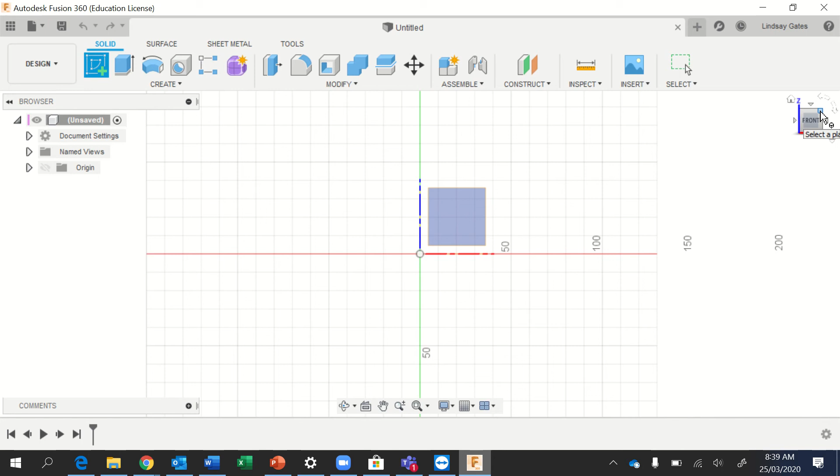If you click on front, you'll be able to look at the front view. Click on the top right corner, you can see from the top right corner. If you click from the top, you can see from the top. And if you click home, you can go back home to a standard point of view.

You always want to start with a sketch. So if I want to draw a sketch, I'm going to choose a plane. I'm going to select my top plane, which is this area here. Try not to be confused with the front or the left or right plane. Click the top, and it'll bring this face towards you.

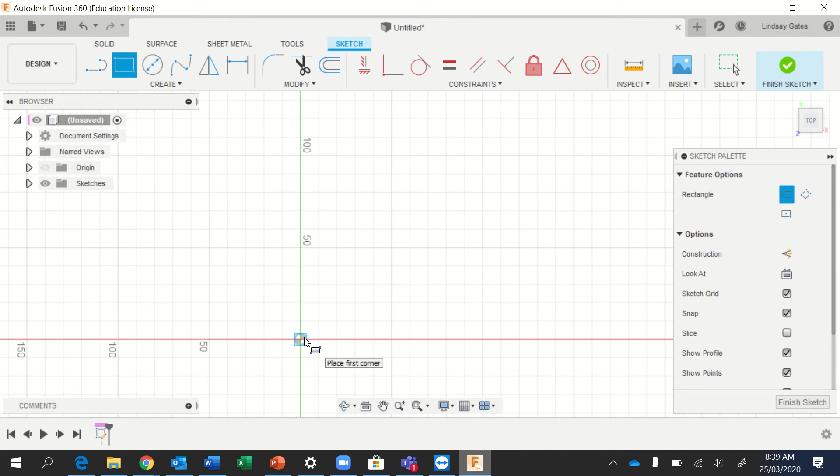I'm going to draw my rectangle. Another command for a rectangle, if you hover over it, it will tell you R. So if I hit that button, or hit R on my keyboard, I can start in the front corner. I know my piece is 140, so I'm typing 140, hitting Tab to switch to the other dimension, then typing 200, and hitting Enter, and I have my piece.

If I zoom out, hold my scroll button down, I can move my piece around. So what I'm going to do is finish my sketch, then view it from home. There's my drawing. Next thing I'm going to do is extrude my piece.

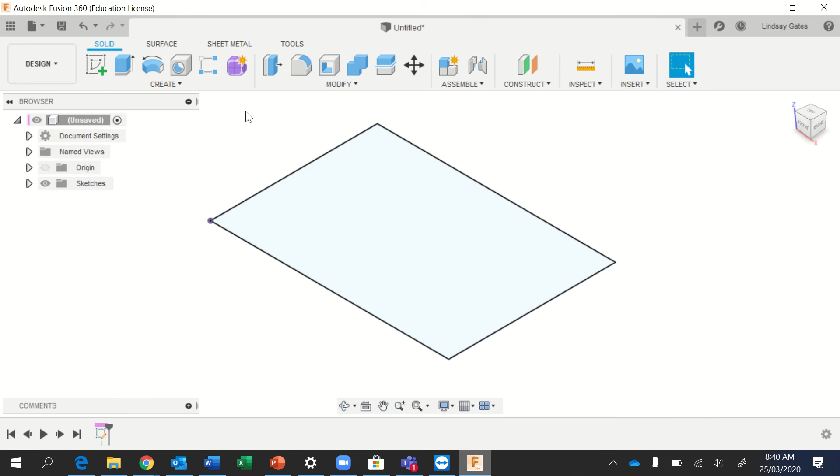Once I click extrude and click the profile, this is a list of what you need to do. Profile - it's already selected. I'll show you how that works. If I deselect it, then click the profile, it's starting from there. We want a new body, that's fine.

We're going to type in this box here, 40 millimeters. And there we have our box, okay?

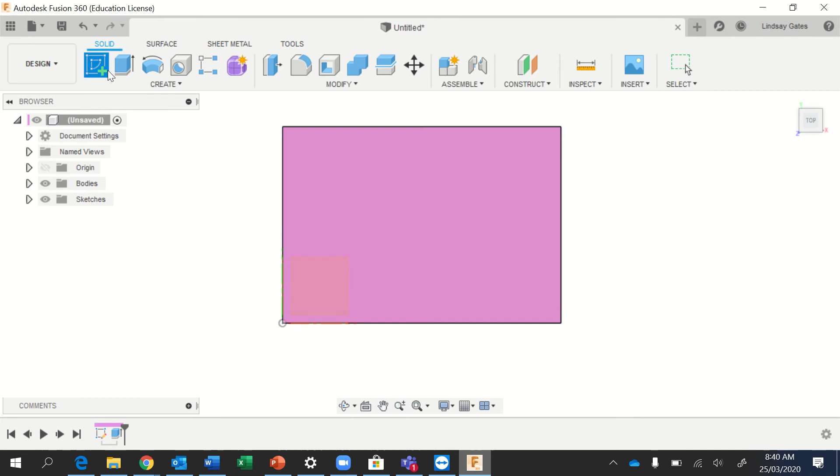Next thing we want to do is create a sketch on top of our drawing. We know that we have a circle almost directly in the middle. If we click the circle tool, which is just up here, or hit C, and move our mouse around the center, we'll end up with these little triangles, same as for the side. So if we roughly align the center with the center, we get our center point.

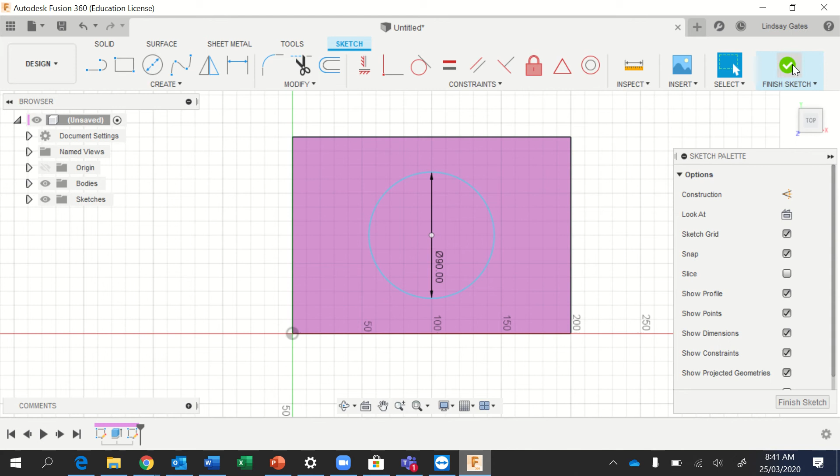We know that our circle is, I believe, 75 millimeters. If it's not, and if it's different for yours, you can change it by simply going in and adjusting it - just double click on the dimension and you can change that. Actually, from memory, I think it's 90, sorry, my apologies. Okay, once I've drawn my circle, next thing I'm going to do is view it from home.

And I actually want to remove this circle. So I'm going to hit extrude, click the circle that I want. Now I actually want to cut this out, so I'm going to drag it down, all the way down, and hit enter. And I have my circle through the center of my money box.

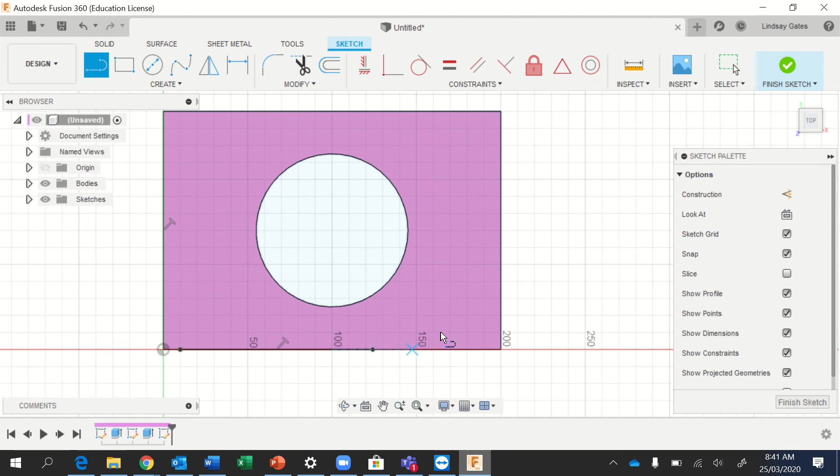Next thing I'm going to do is create another sketch on top of my drawing, and draw a bit of a shape, okay? You can use a line tool, which does something like a straight line along here. So you could do a straight line and another line and another line, click, click, click, up to you what you'd like to do. Maybe make it go out a bit. Now remember, this is just all random shapes, and link it back together.

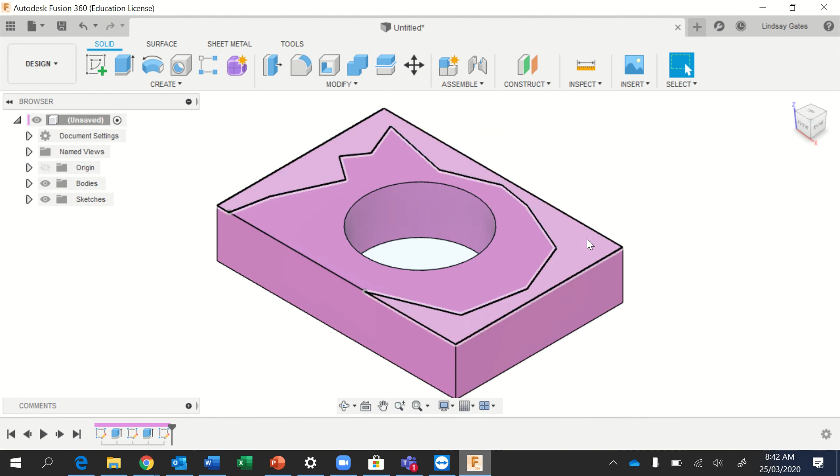So if that's my shape, as unusual as it is, and I'm done, I'm going to click Finish Sketch. Next thing I want to do is remove the area around the outside. So if I view that from home, click on this area I want to remove, click Extrude, and just drag this blue slider straight down, it will remove the area, and I should have my money box of that shape.

Now, I'm just going to undo those steps because I don't actually want those lines. I'm going to do something a bit different - I'm going to draw with a spline tool.

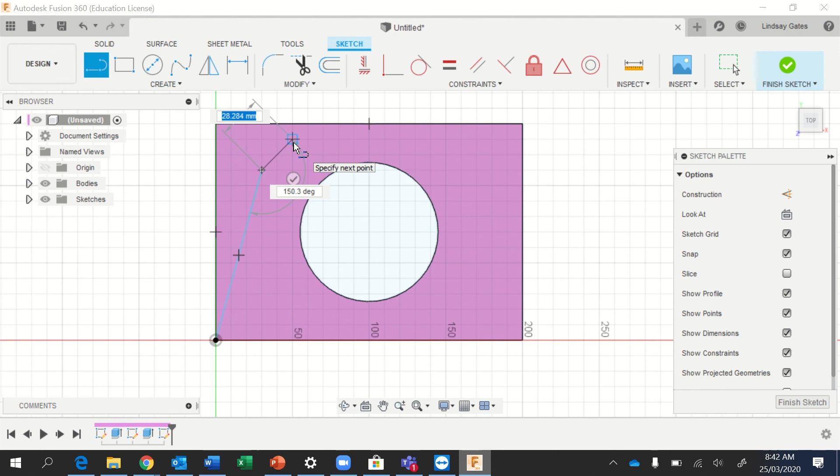So if I have, for example, a normal line and I have a shape that goes like this, but then I want to say automatically when I finish a line it has another one there - all you need to do is hit enter to confirm it, or when you're finished, press escape. If I click my spline tool and click on my starting point, and specify a second point, I can then use my mouse without clicking to curve this line, okay?

Now you can adjust these later, so if it wanted to be a bit of a curved shape, whatever this may be for you, you can adjust this as can be. So let's just say we're going to go like so. That's going to be our line.

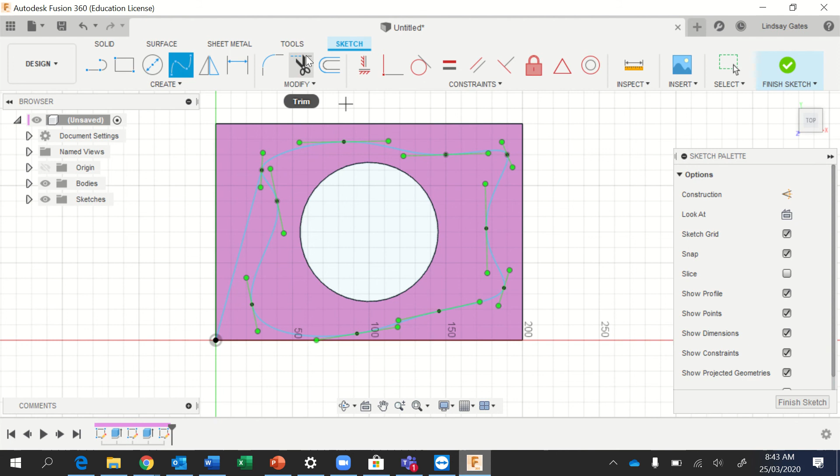Now if there's a line I don't want, I'm going to go up here to my trim tool, click trim, and delete the line I don't want. Finish my sketch, go view from home, go to my extrude, click the area I don't want, and drag it down to remove it. And there I have my money box shape.

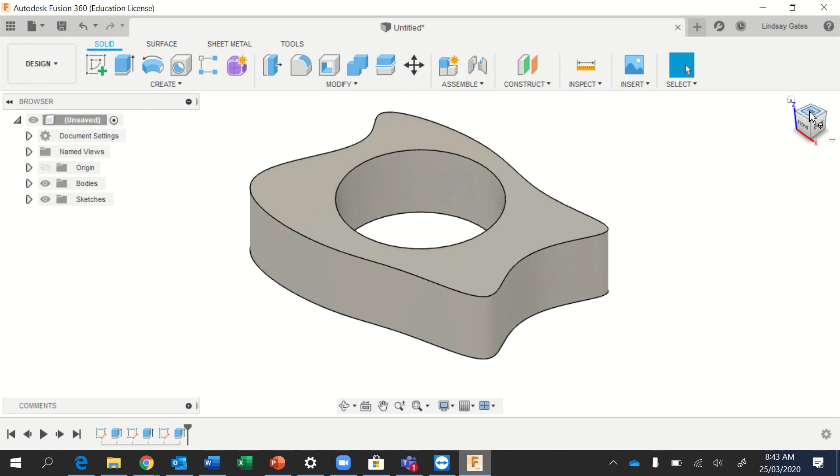Now you can toggle the cycle component color to make it grey if you'd like, up to you. You can actually adjust the appearance later, but for now, I'm going to let you guys experiment with what to do with your lines, okay? Again: a sketch, a drawing, extrude, and then remove. Hope this helps.